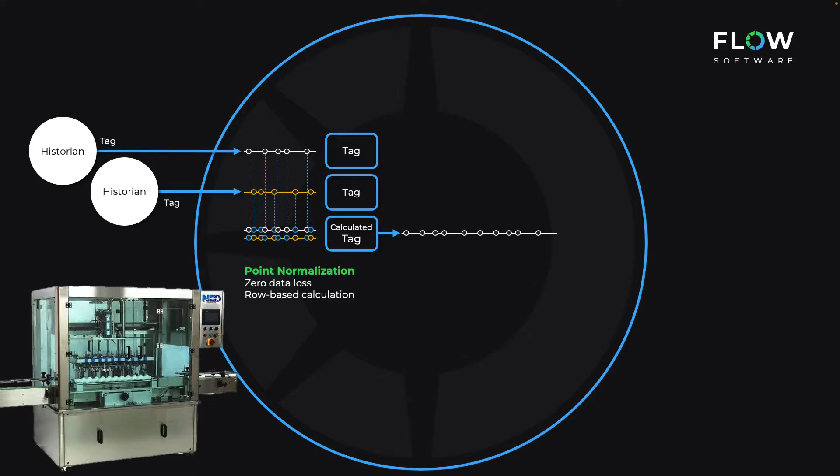All right, so for my first example, I'm actually not going to do a query to a SQL database. I'm going to have two historians. As you can see, I've got a little filling machine application here. The one tag in my historian is going to tell me what is the state engine of the filling machine. Am I busy in the production run? Am I busy with setup, so am I changing over to a new product? Am I busy in CIP or cleaning in place?

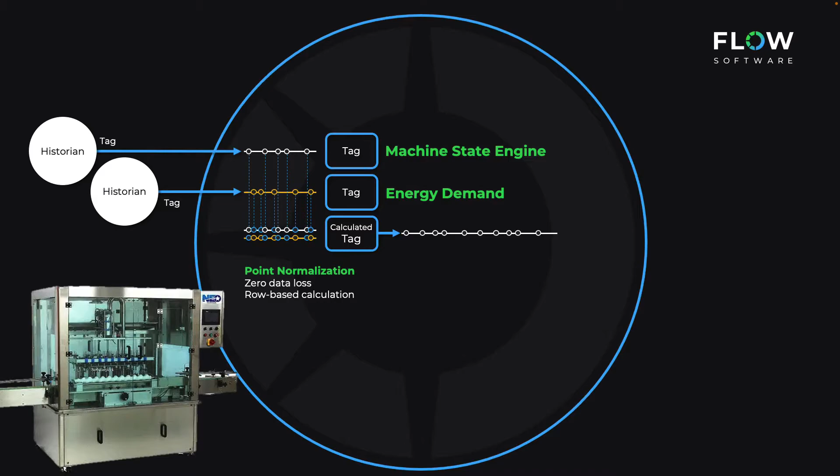And I've got another tag in a different historian that tells me what is my energy demand. So at the end of the day, I'm looking for a KPI that's going to tell me, hey, what is my energy per state? I want to see if I can identify maybe when I'm doing a CIP, or when the piece of equipment is idle, that I'm actually losing energy or losing cost based on the energy consumption of this device. So let's just quickly create these calculated tags within Flow.

All right, so I'm going to switch over to the Flow configuration environment. This is a little client that we use to create the model. You can see here I've got my model of my filling machine. I've got the total throughput, so how many good and bad production did this filling machine deliver. I've got a downtime event here to check the downtimes, the event frames as well. But one thing that I don't have yet is the utility. I've got my folder structure for the utilities, but I haven't created any KPIs based off that.

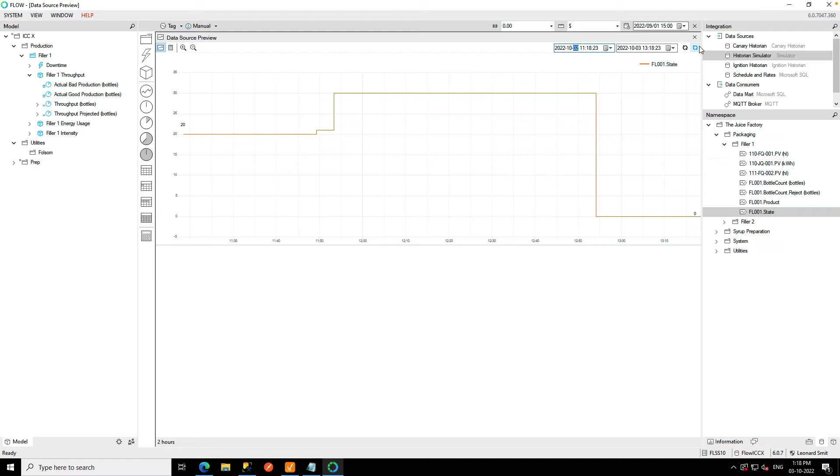On the right hand side here, I've got my different data source connections. You can see I've connected to a Canary historian, and I'm connected to the Ignition historian here. That will bring me the tags as they've been historized inside of that historian. And I've got this separate historian that stores the state engine as well. So let's have a look at that. I'm going to double click on this. It's going to browse the tags in that historian. Remember, we do not replicate this data, we pull it directly from it.

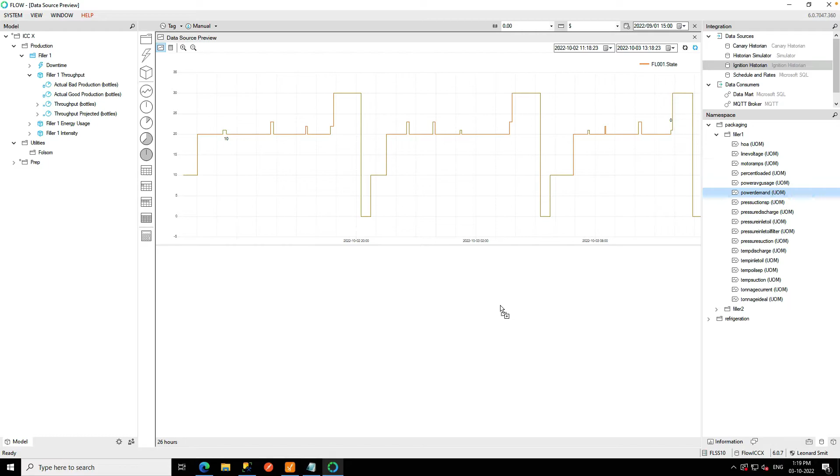So this is the state engine. If it's in state 0, it's in a stop state. When it's in state 10, it's busy with the setup state. Then it's in the production state when it's equal to 20. These little blips here are downtime events that happen on the filling line. And the last state, state 30, is our CIP process. Now, if I look at my Ignition tag historian, I do have the energy demand for this as well. I'm going to drag this to the bottom here, and I can see what my energy demand is.

So if I zoom in here, I want to do two things. I want to detect the energy demand when I'm in this setup phase, so when I'm in state 10, what is the total energy that I'm utilizing there? And lastly, when I'm in CIP mode, that's state 30, I want to know what the energy usage is there.

All right, so I'm going to extend my model here a bit. I'm going to create a metric, and the metric is going to be filler 1's energy. I can't spell this morning. Energy cost. Cool. So that's the KPI. I want to know what is the cost of my filling machine based on these different states that I've got.

I'm going to do two things. I'm going to take the raw tags from the historian and drag that across. So this is my first tag, the source tag for my power that's been historized. But I also need that additional source telling me what the state is. So I'm going to go back to the second historian, take the state tag here, and add this in as well. This is going to be my source tag for the state that I'm currently in.

All right, so this is the raw tags. If I open this up, you'll notice that it will give me the data as it is historized. Again, we do not duplicate this. This is just a view into these data sources. But what I want to actually do now is create a calculated tag, right? So I want to filter out the states that I'm not interested in.

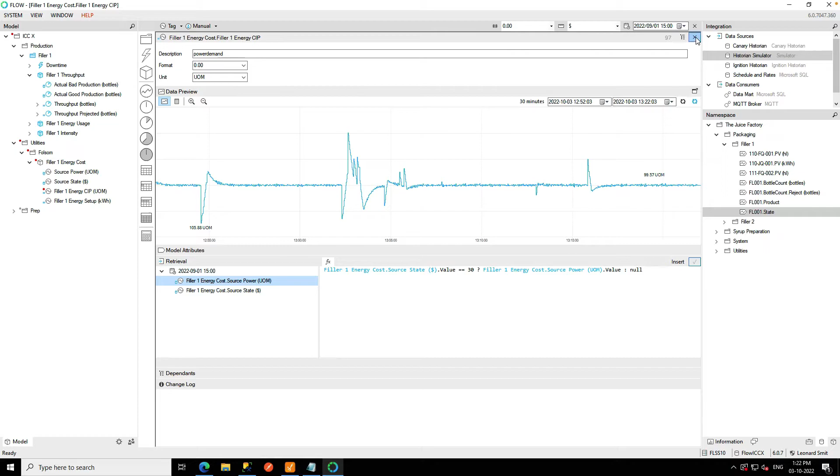Let's quickly finalize the CIP one. Exactly the same process. I'm going to drag in the state here, and I'm going to say if the state is in state 30, then please return the value of the power, else just return null. Validate the calc, and let's close this guy up. Cool. Let's see if it worked.

Let's drag in the setup state here into this tag viewer that we've got, and there we go. Now you can clearly see that I'm only using this blue portion here for this initial setup state. That's the only part that I am interested in. So technically what I've done is I've created a calculation based off 2 different historians, and I'm filtering out based on a state. Okay, so if we go back to the slide here, that's exactly what I've done. I've used my tag calculations to actually filter it out based on a state.

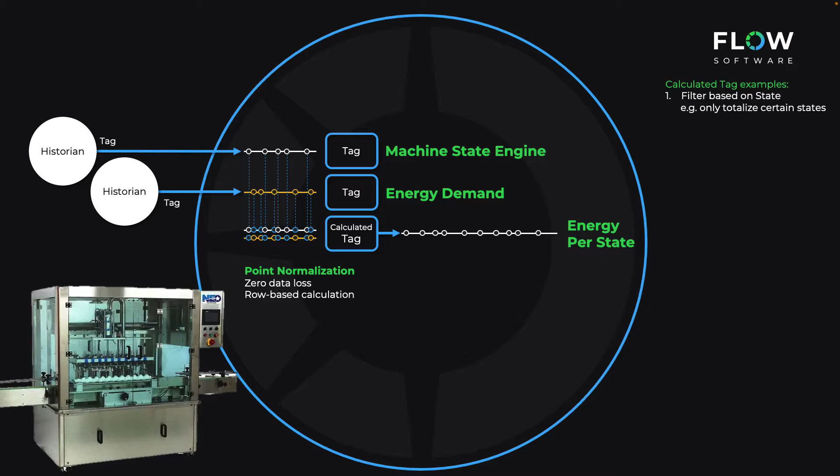Right, let's take this a step further. Let's do what we call a period normalization on top of this data. So what I would like to do is I would like to take those tag calculations, and I want to now slice it up into periods, into hours. I want to know what was my hourly usage when I'm in the CIP state. And I'm going to go and create those calculations as well. Now, what do I want to do with this? What are the KPIs that I'm actually interested in?

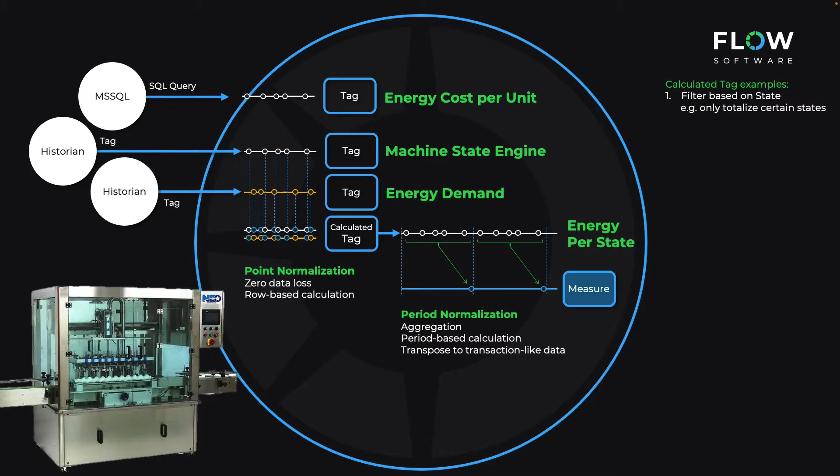Well, think about this. If I can get the cost of what it cost me per unit of energy, then I can actually go and create a KPI that's going to tell me what did it cost. What did this machine cost me when I'm in CIP or in idle state or setup state? And I can actually project this potentially into the future, and I can see what it's going to do at the end of the day, how much energy can I expect to be paying based on a little bit of a projection or a forecast. All right, so let's do that.

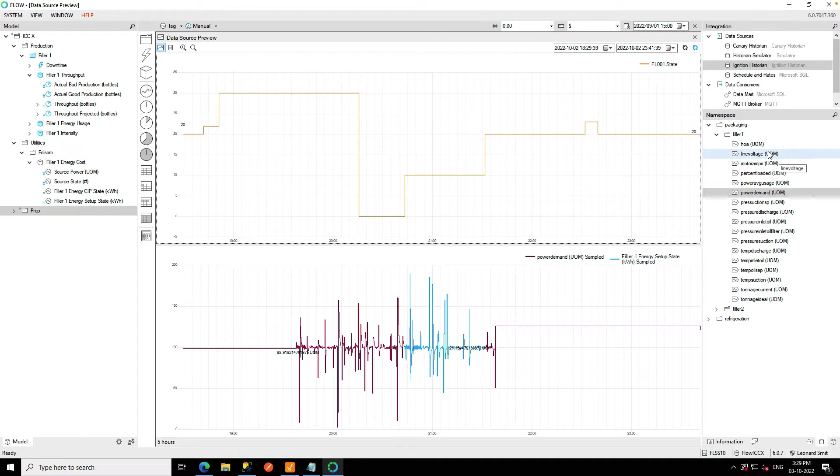All right, I'm back in the flow configuration environment. I'm just going to close the raw data editor here, and I've got another data source here, which is my schedules and rates database that comes from Microsoft SQL data source. In here, I've got the actual cost per energy unit, and I'm going to utilize that to obviously see what the actual cost of my energy usage is.

So what I'm going to do is I'm going to create a new metric here. This is going to be my cost per energy unit, and I'm going to drag in this tag in here as well. All right, so this is my base rate. I'm just going to call that my base rate of electricity.

And now what I'm going to do is I'm going to actually create this period normalized measure for the hour. So I'm going to drag that onto the hourly icon, and this is now going to give me an hourly rate. That being in cents, I would like to change this to actually be dollars. And I'm just going to do a little bit of a scaling factor to change the cents into dollars there. Do a time-weighted average on that. That will then give me the cost of kilowatts per hour in dollars.

I'm then going to take my setup state. I'm also going to create a period of that. This is going to be my hourly energy usage per state. And let's deploy this guy out as well.

All right. Now what I can actually do here is I can go and create a cost calculation. So I'm going to take the hourly rate. I'm going to call this my cost, and I'm going to go and change this to be dollars. And now literally I can take my kilowatts multiplied by my hourly rate, and that should then give me a rate per hourly kilowatt usage.

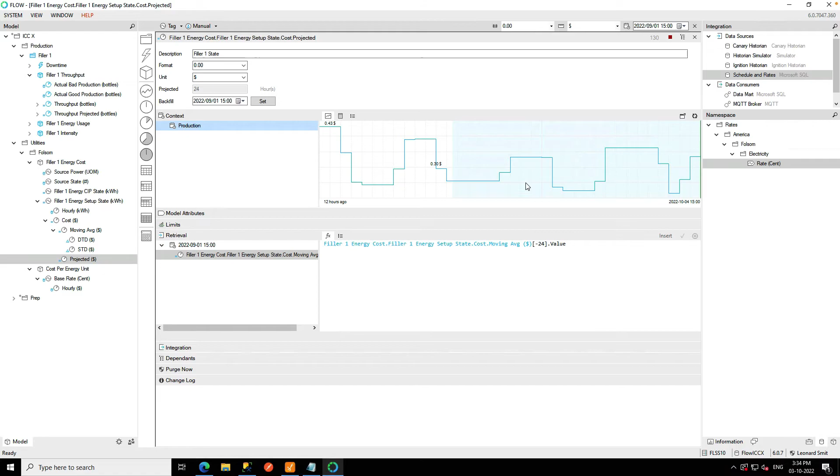Alright, so that's my projected guy, and I'm going to do 24 hours into the future, and I'm going to now clear out the expression editor here, and then just look at a previous period, which is going to be 24 hours back. So I've got that 24-hour moving average projected forward. Deploy this out, and now I have a projected guy going in here. Let's just see how that works. The engine is going to pick it up. It's going to do its thing. There's the projected values. We can see here that's all the way to the end of tomorrow, the 4th.

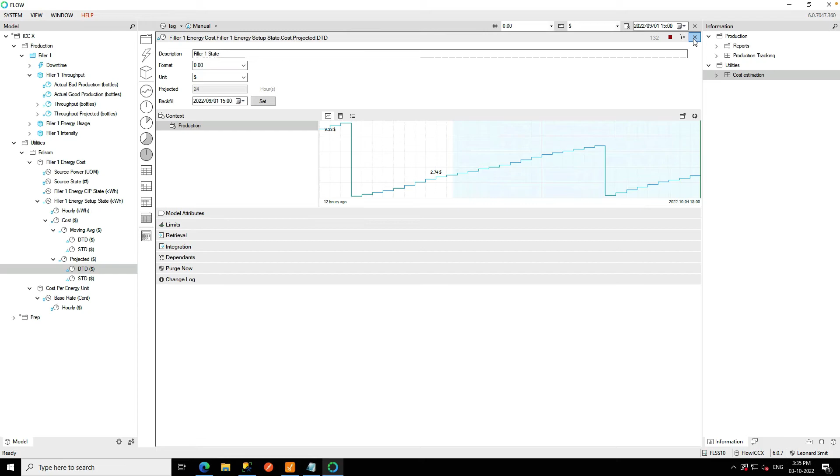All right, and let's just do a projected of that as well. So shift to date and a day to date, so you can see where we're going to end up from a day to date perspective. Right, very importantly, I need to be able to project this guy as well, right? So just before I forget, I need to project the day to date into the future as well. So let's do that, and the engine will then project this guy into the future. There we go.

Now I've already created a chart for this, just to show you guys. I'm using the KPIs in my model just to say what I want to show on the chart. So this is our flow server front end. If I go to the cost estimation graphic part here, I can see this is where I'm currently at from a day-to-date perspective, and then at the end I'm going to probably end up with $6 worth of energy utilized there. I've created another dashboard just as an example from my production side as well, so I can track my production. So here you can see again same kind of concepts but based on the throughput, and I've projected that into the future as well. So that's just a little bit of the graphical capability that we've got.

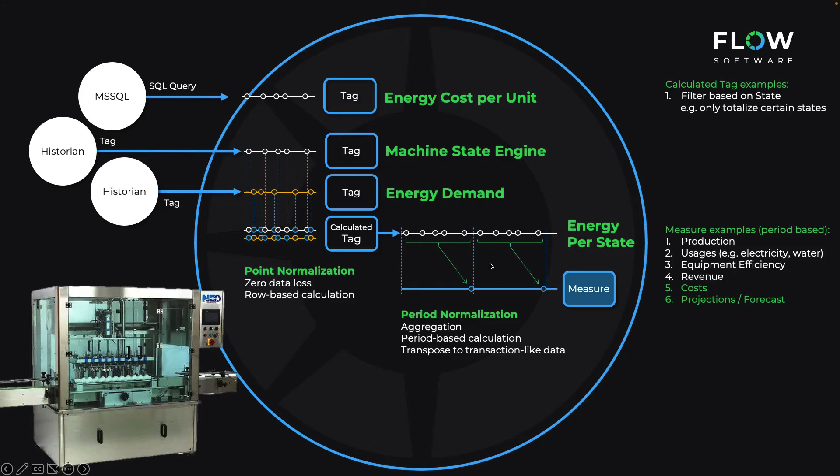All right, so I took the tag calculations, I've created these periods, then obviously to complete the circle we can then visualize it. I showed you guys a little bit of the visualization capability that we have, a lot more capable than the little part that I've showed you just now in the visualization. But a very big thing for us is to be able to bridge this data out.

Now there's numerous ways that we can bridge it. We can bridge it back to potentially a data mart. We can potentially bridge it back to the historian. We can even put it back on the MQTT broker for a real-time sensor to actually consume that. We do have messaging where we can push it out to our messaging system, and we can also go and create tiering. If it's a multi-organization, we can tier one flow with another.

But we also have a REST API that makes this available to be consumed by machine learning tools or BI tools or SCADAs. So all of this can be utilized through our REST API. Now, very quickly, let's look at two of the consumers that we've got. All right, so I'm back in the configuration tool. I'm just going to close this configuration here.

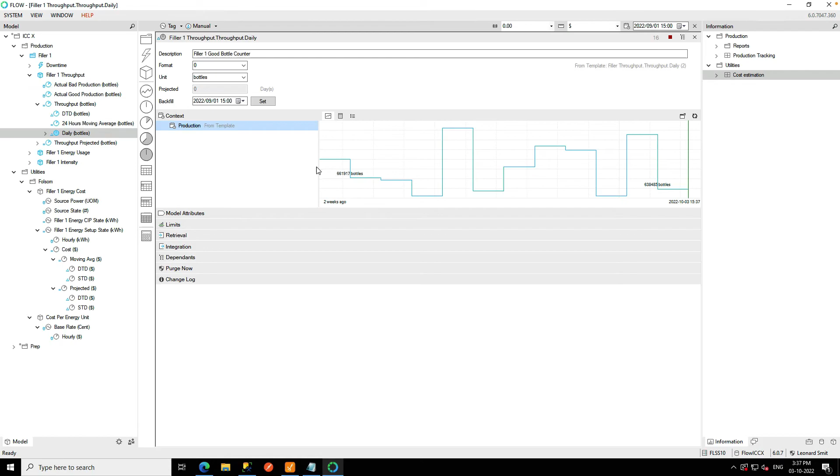Now, I've created my actual throughput here as an example. So here I've got daily total of product that I'm manufacturing. And you can see here that I can go and specify integration. And I've got two consumers currently set up. One is a data mart, which is a SQL database. The other is an MQTT broker.

All right, so I'm going to drag my consumer, literally going to drag that into the integration section here. And I'm going to drag my MQTT broker here as well. Being a database, I've got full control of the query that I need to adhere to from the schema of the source. I've already created a query here that I'm just going to copy and paste for my schema of my data mart, and I'm going to plonk it in there for us. I'm going to deploy this out, and then it's going to go. I'm also going to deploy out the MQTT broker.

Let me just clear out my table. So let me show you that there's nothing in this table, and let's start pushing. So I'm pushing over MQTT. I'm also pushing into the data mart. I do have a little MQTT broker here as well that I'm going to connect to, and let's see that data coming in. There we go.

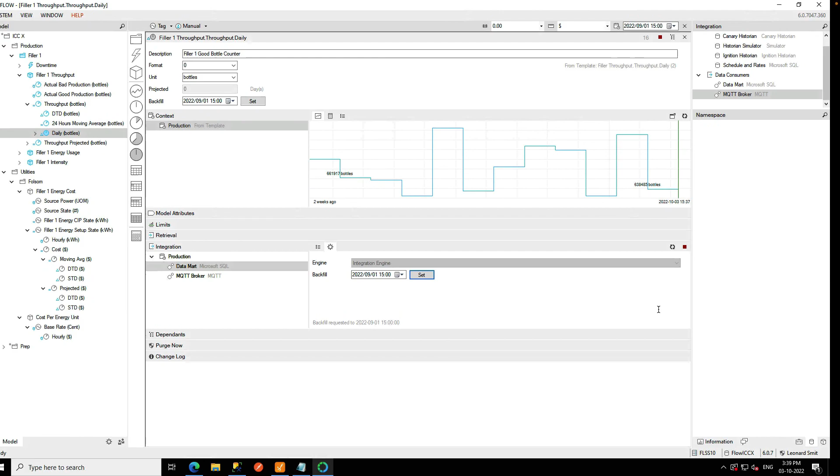We can see our message comes up in the topic and following my nice model, and I can see my daily bottles there. So there I can see my actual production value on my MQTT broker, and if I execute this in my SQL, there we go, populated my data mart there as well.

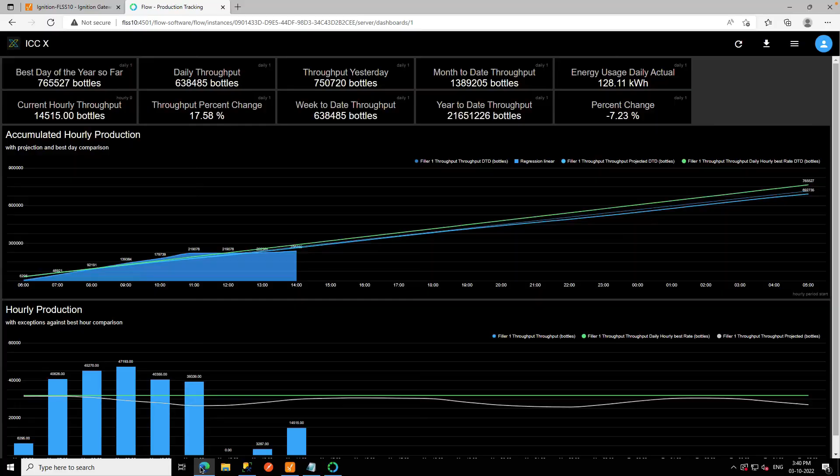We also have a module for Ignition. So very quickly, I just want to show you guys that if I go to the configuration here, obviously you need to log into the gateway, and right at the bottom I've got my Flow analytics provider that I can configure, and what that will allow me to do is just browse it as a tag within Ignition.

So on my chart here, I am able to go and browse for the tag. So if I click on that, you'll notice that it does pick up as a historical provider, and you can just see now all the KPIs that I've configured available for me to just pick and be able to show that in an Ignition screen as well. All right, so that's how we would use the REST API to actually go and consume that data out.

What do we push out? Well, we push out the tags as well as the events and measures that we store. So all of that is stored in or can be passed through with the API. Right. Some of our clients, Flow is quite a generic tool. As you can see here, being used in food and bev and in manufacturing and mining. So very versatile in the type of industrial information challenges that we can solve for our clients.